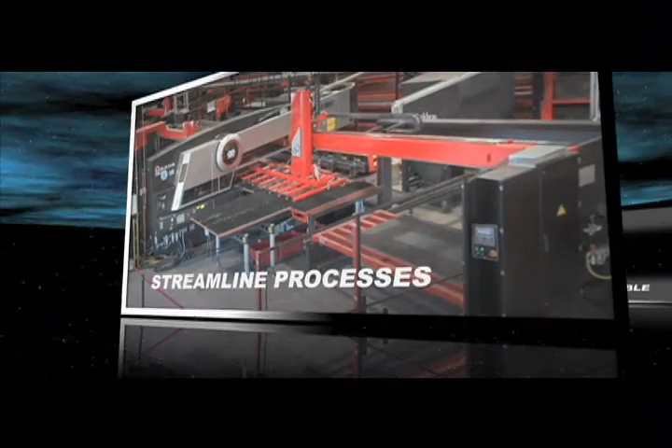Automation is a key word for us. State-of-the-art automation. Flexible. Streamlined processes. Haaland is always overcoming challenges and creating a clearer vision of the future. The challenge of automation.

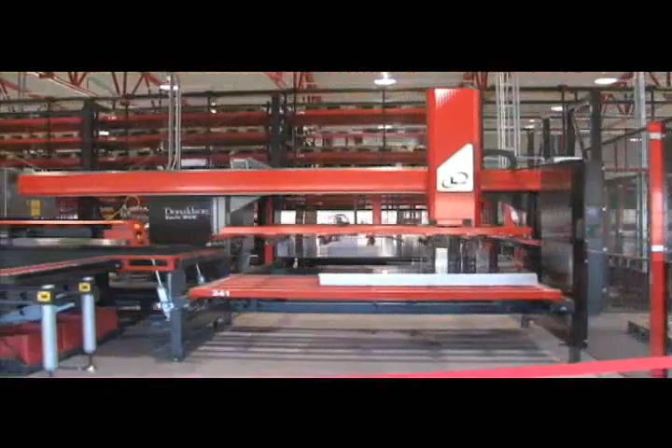Norway. This country is famous for its fjords and wild and beautiful nature. And Haaland is located about 50 kilometers south of Stavanger. Over the past couple of years, Haaland has faced tremendous challenges to introduce and incorporate state-of-the-art automation systems into their facilities. The people of Haaland are proud to share their story and success.

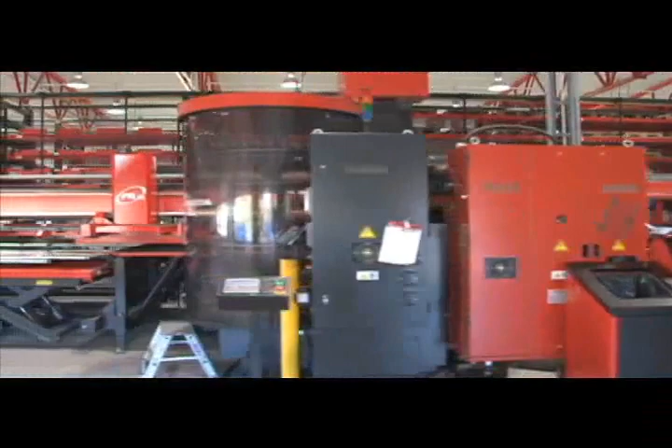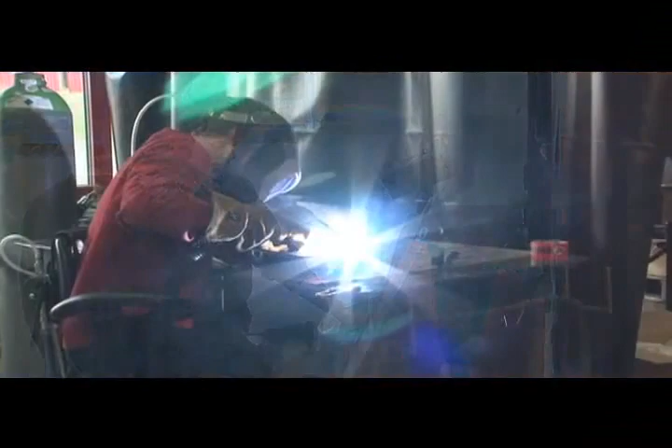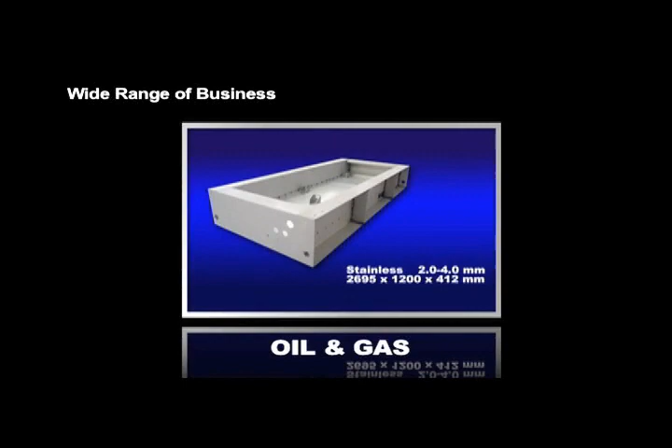My name is Ragnar Sandva. I'm the managing director of HAALAND. HAALAND started its current sheet metal business back in 1982, and we are currently about 100 employees. We are a subcontractor company, and we are covering a wide range of businesses from oil and gas, electronics industry, agriculture, and also some for the maritime industry.

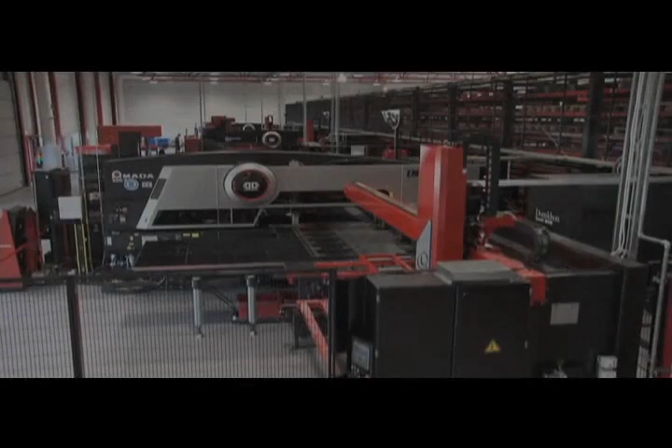Mr. Ragnar Sandva explains the reason why Haaland introduced state-of-the-art automation systems into their facilities. We did a lot of forklift driving, transporting raw material into the machines and also finished goods out of the machines. We used to spend maybe many thousand hours driving forklifts all around the factory, and there was a lot of manual tool setup.

When we decided to build a new factory, Amada was the company that came up with the best solutions to our questions. We saw the entire manufacturing process from design through programming, production and finished goods.

The first phase of the automation project started in 2006, and Mr. Elin Eredsvilla, technical manager, explains how he felt about installation and training by Amada's global project members. Perfect installation from Amada. It was well planned, everything went as it should, and the installation was finished approximately 3 weeks before schedule. During the installation period we had training of operators and software and everything.

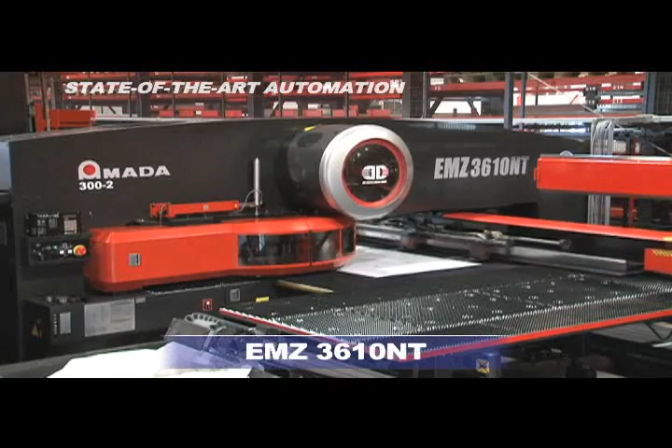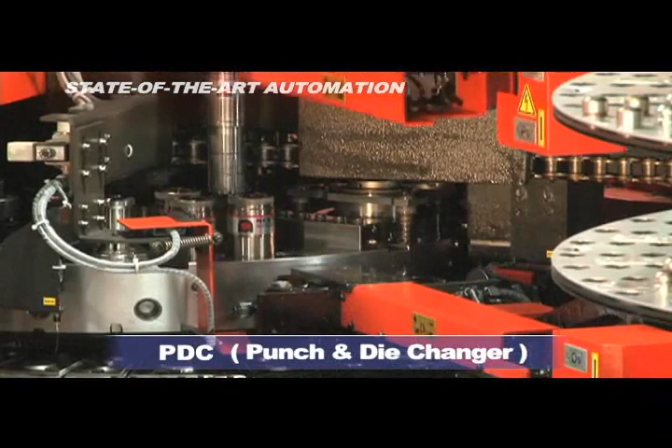Let us first take a closer look at their new automation system in the blanking process. There are two EMZ 3610NT punching machines and one EML 3610NT punching and laser combination machine combined with the PDC, or automatic punch and die changers, as well as an automatic sheet loader and parts unloader. Those three machines are connected for a total of 299 shelves in the CSII 300 automatic storage system.

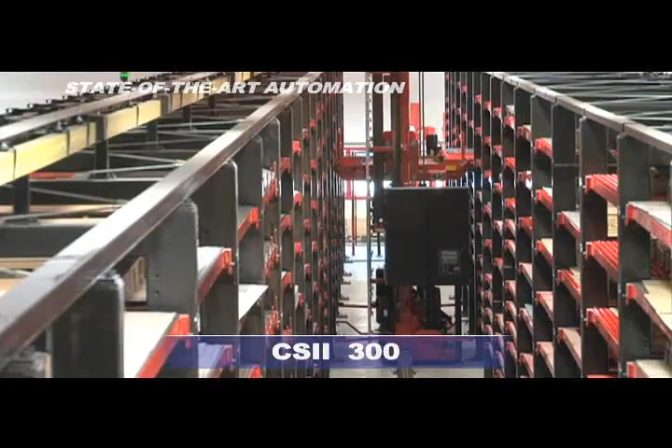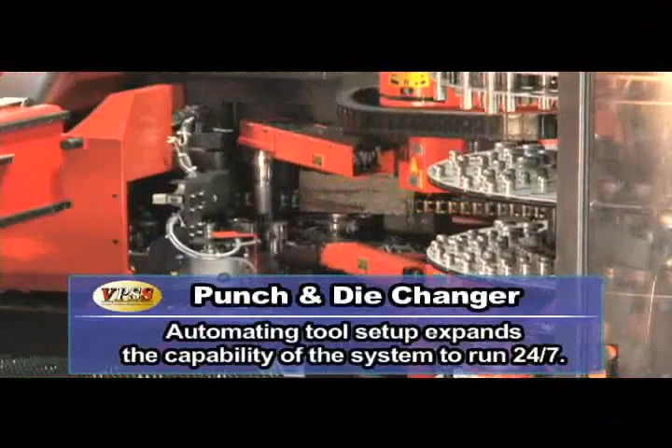Much more flexibility. Doesn't matter if it's 10 or 500. The automatic system can do that for you, and you also got the tool change. That was a revolution for us. In the old way, by doing everything manually, finding raw material, doing the tool change and stuff like that, we used 1 hour and 5 minutes. Afterwards we used 4.5 minutes in the same operation. I think we save approximately 12,000 hours a year.

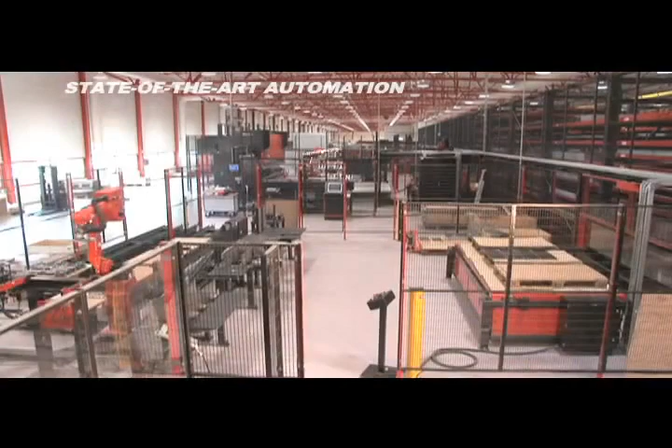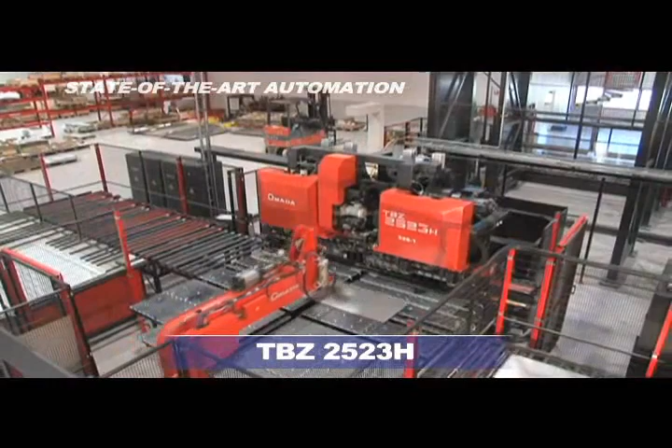Next, let's take a look at their automation system in the bending process. There are two different types of machines. One is the TBZ 2523H panel bender, and the other is the Astro 100 NT cell bending robot. For the right products, TBZ is very, very efficient.

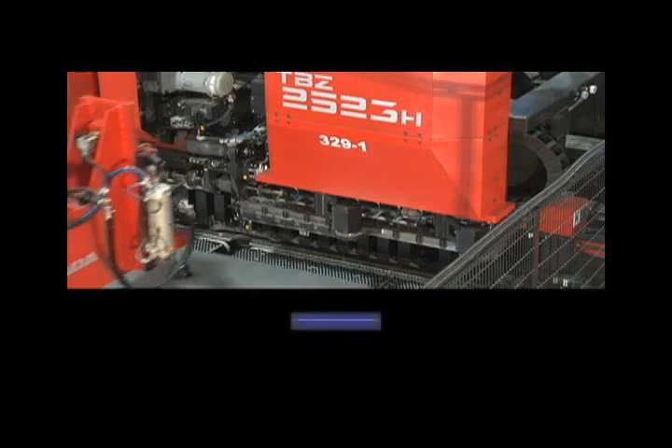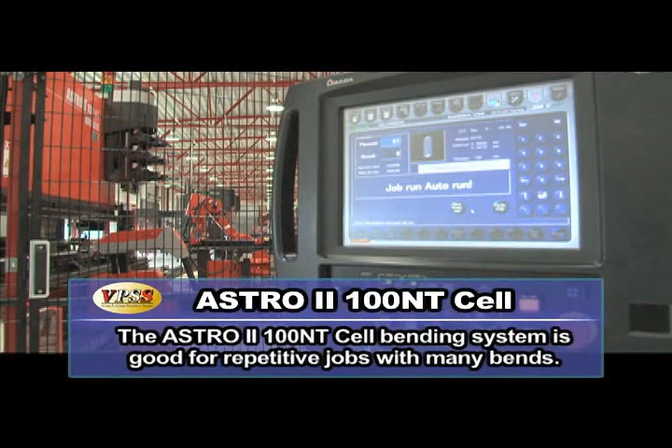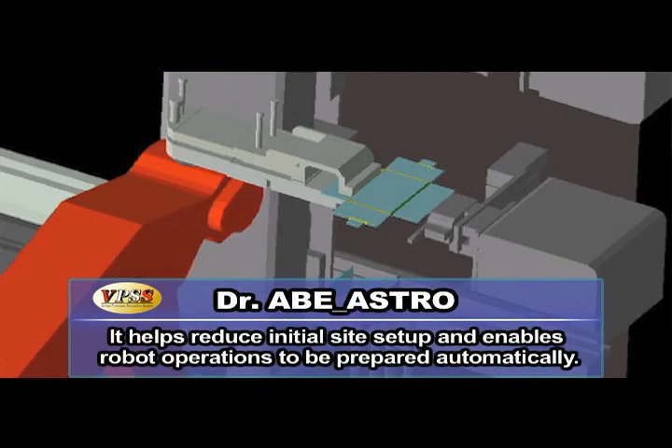Astrocell is very good for repetitive jobs with many bends, and it's a very stable partner for big series. So it's not an operator just sitting there and waiting for the jobs to be done. He's also programming the Astro, so he has to go back to the office and do the programming for the next jobs. Compared to the old setup, we have reduced man-hours at least 50%.

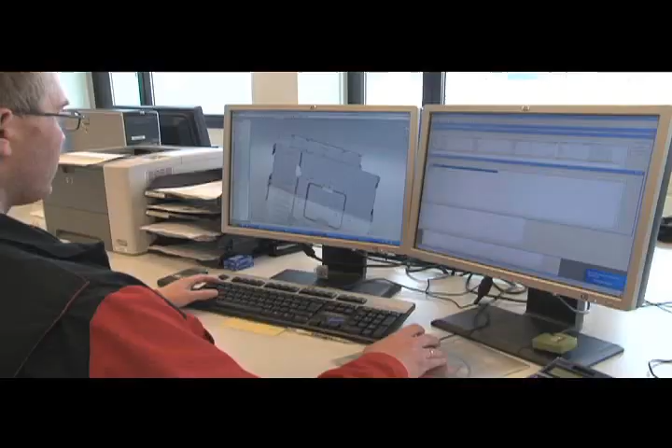During the first phase of the automation project, HAALAND focused not only on machines, but also software. The software works quite amazing because of the accuracy of bending with bend deduction and stuff like that, that's quite a different way than we have been used to earlier. So the software system, the way Amada does the thinking, sees the full picture. I like the way Amada thinks.

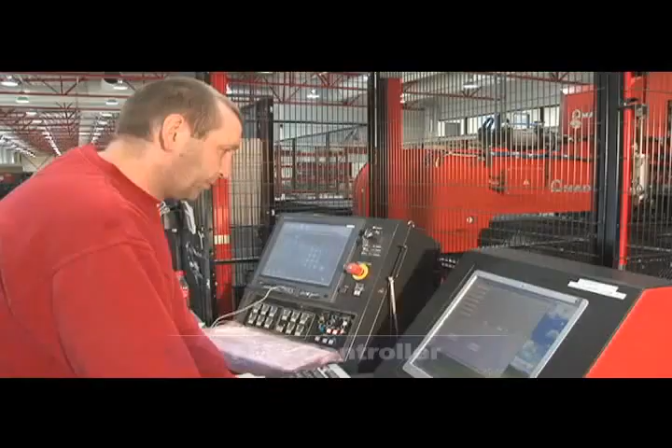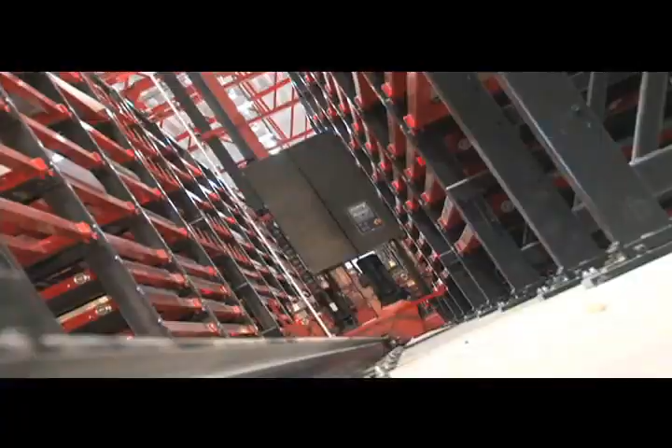With the FMS controller from Amada, now you can also plan 24 hours each day. The most amazing thing is that since startup at the end of 2008, there have been no problems with tool changing with the CS system or anything. It's running perfect. vFactory, we want to use vFactory as our marketing tool for showing them live what's happening now.

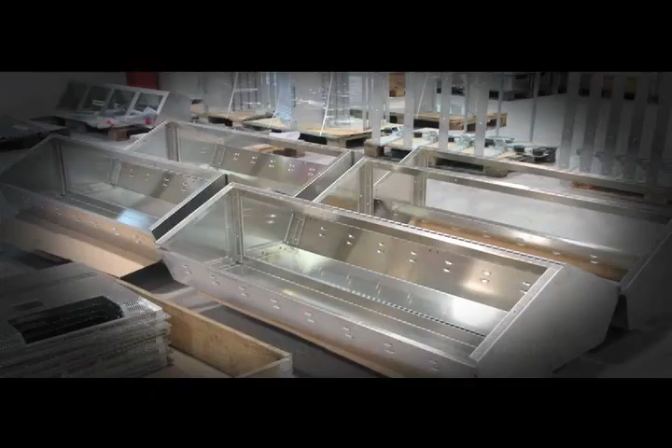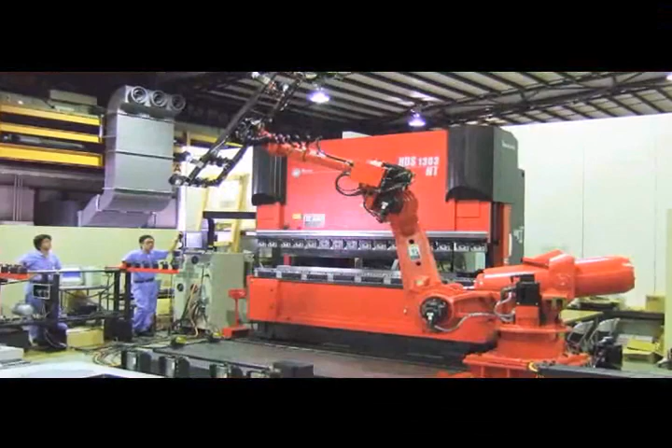As we have seen here, HAALAND has achieved state-of-the-art automation in the blanking and bending processes and increased productivity, but their automation challenge continues as follows. Over the last 1.5, 2 years, that changed to bigger parts, and we saw the need for a bigger Astrocell. After a long developmental stage incorporating various methods of testing and rigorous analysis, Amada engineers complied with HAALAND's request by suggesting the HDS Astro 165W bending robot system in 2009.

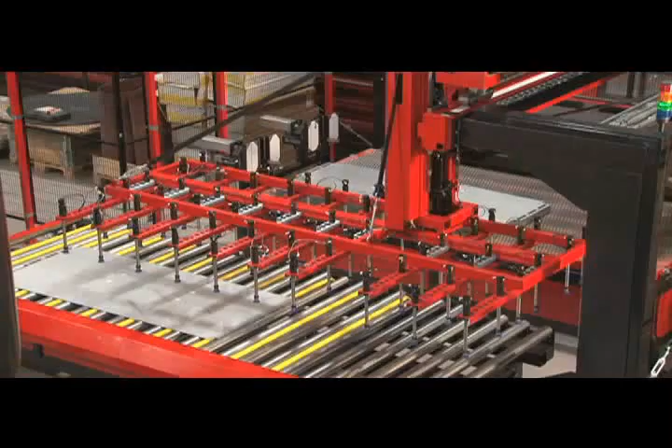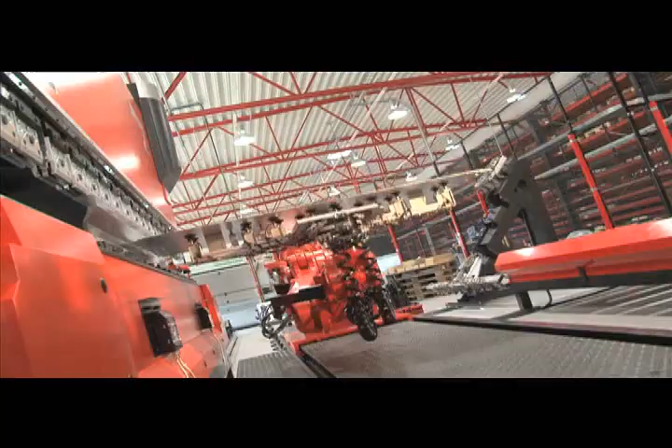That's been quite genius in our production because for many of the big parts we had to use 3 or 4 people lifting. Now we don't have that anymore. There is one robot lifting the parts easy as anything, and that will be one of the biggest gains for us in comparison to manpower.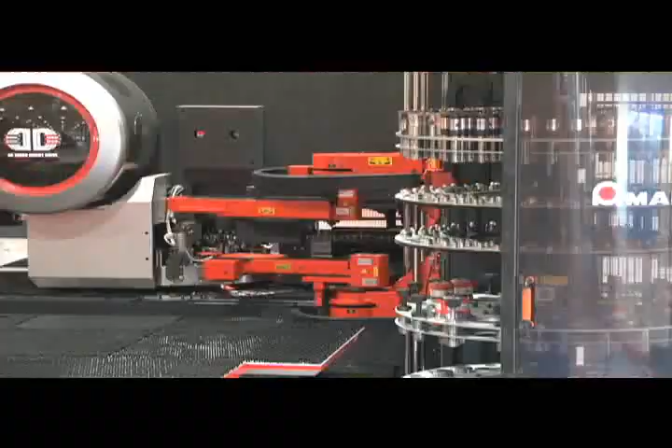By utilizing a state-of-the-art automation system, HAALAND has eliminated a great deal of material handling time, as well as tool setup time, while also increasing productivity. It flexibly performs for a wide range of different sized parts, efficiently, regardless of the production lot size.

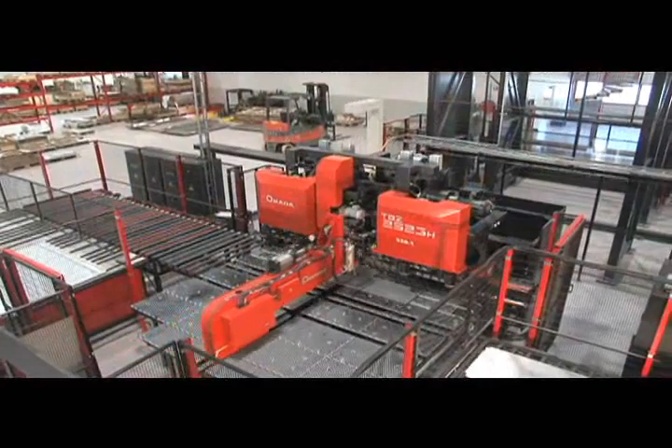In closing, we asked Mr. Ragnar Sandva about his future plans and relationship with Amada. When we look into the future, we see a further expansion of our business over several fields, and some of the customers that we have today are steadily growing. Communication between Amada and HAALAND as it is today, I think that's very good, and we should continue to challenge each other.